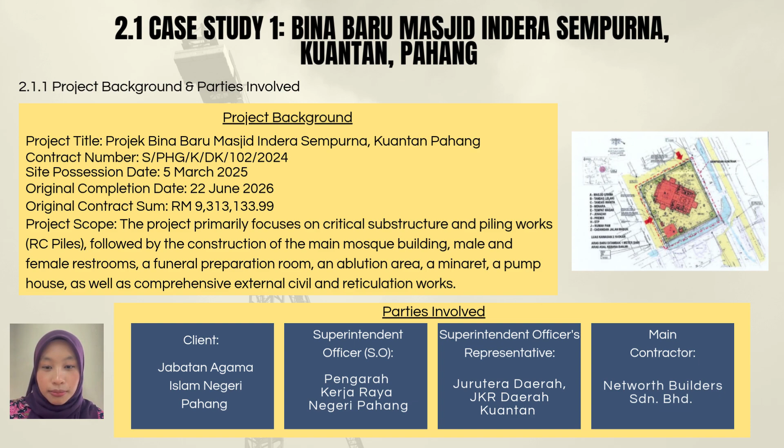The scope of this project is comprehensive. It covers everything from critical substructure and RC piling work to the main mosque facilities such as the ablution area, a minaret and external reticulation work. Behind this project, we have 4 key parties involved. The client is Jabatan Agama Islam Negeri Pahang and the SO is Pengarah Kerja Raya Negeri Pahang, represented by JKR Daerah Kuantan, and the main contractor is Networth Builders Sdn Bhd.

Moving to the next section of the slide, let's look at the design considerations for the foundation. First, due to the heavy and concentrated load from the dome, minaret and wide prayer hall, a deep foundation is required. The solution chosen here is RC square end bearing piles measuring 200 x 200 mm with a working load capacity of 250 kN per pile. These piles are driven to a depth of about 24 meters to reach the stable, competent bearing soil layer. To achieve this depth, shorter pile sections, specifically 12 meter joints, are welded together during the driving process.

To conclude the foundation work safely, the engineering team applies the Hiley formula. This allows them to verify the final set and guarantee that each pile meets the load capacity required before completing the foundation work.

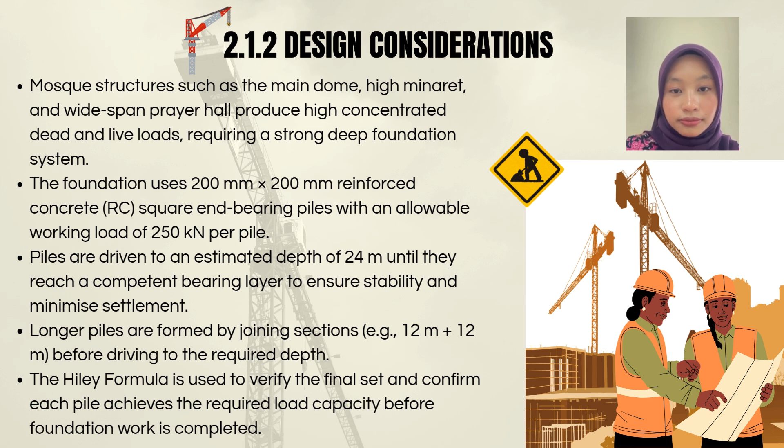Hi, my name is Shohada and I will explain the construction method justification for our first case study, which is the new mosque in Kuantan. For this project, we use precast reinforced concrete driven square piles, measuring 200 mm x 200 mm. Why was this method chosen? A mosque has concentrated structural load at specific heavy zones, like the minaret and main prayer hall. Precast piles are fabricated off-site in a factory, meaning they offer superior quality control and eliminate the time needed for concrete to cure on site.

To reach the required depth of roughly 24 meters, individual pile sections were joined together using butt welding at the joint. We also used mild steel pile shoes at the bottom tip to prevent the concrete from cracking when driven into hard soil layers. My name is Natika Najwa.

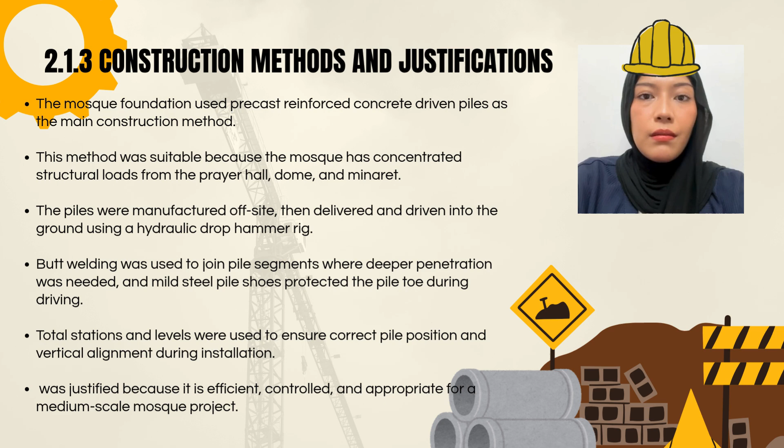Let's begin with material use. Material selection is strictly driven by structural loads and ground conditions. For the mosque project in Pahang, we utilize 200 mm x 200 mm precast reinforced concrete square piles. Cast in a controlled factory setting, this achieves a high concrete strength of grade 45 or above, which is crucial to withstand intense dynamic driving stresses. To reach the required design depth, multiple segments were spliced on site using mild steel joint plates and high penetration structural welding.

In contrast, the FT003 infrastructure upgrade in Kelantan demanded 1,800 mm diameter cast-in bored piles to support massive bridge piers and dynamic traffic loads over a soft river bank. Here, we use high slump, self-compacting, ready-mix concrete of grade 35 to 45 formulated with retarders to delay setting during long pours. Heavy high-yield deformed steel reinforcement cages were fabricated on site and lowered into the shaft.

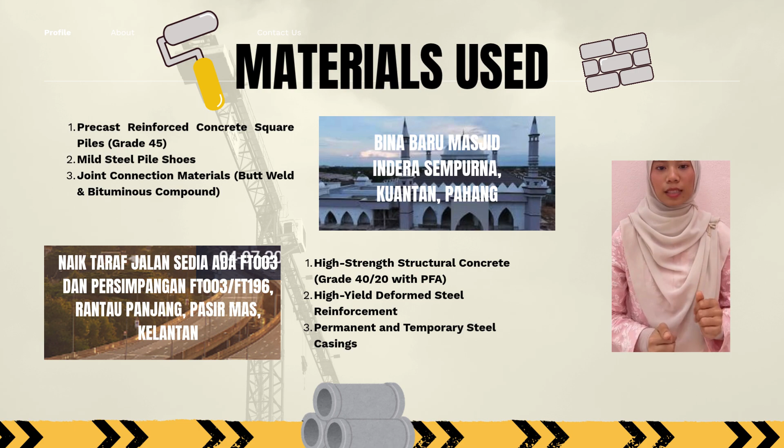To prevent the loose riverbank soil from collapsing, thick permanent steel casings were installed near the surface, paired with a specialized bentonite slurry fluid to hydraulically stabilize the borehole walls. This brings us to equipment and machinery, which highlights the physical execution of displacement versus replacement methods. For the precast piles in Pahang, our primary machine was a hydraulic hammer rig. Hydraulic hammers offer excellent efficiency because operators can precisely control the drop height and impact energy, minimizing pile head damage.

After drilling, a service crane lowered the steel cage. Concrete was discharged via a tremie pipe system. This system poured concrete from the bottom up, cleanly displacing the drilling fluids without mixing or segregation. A desanding plant filtered and recycled the bentonite slurry.

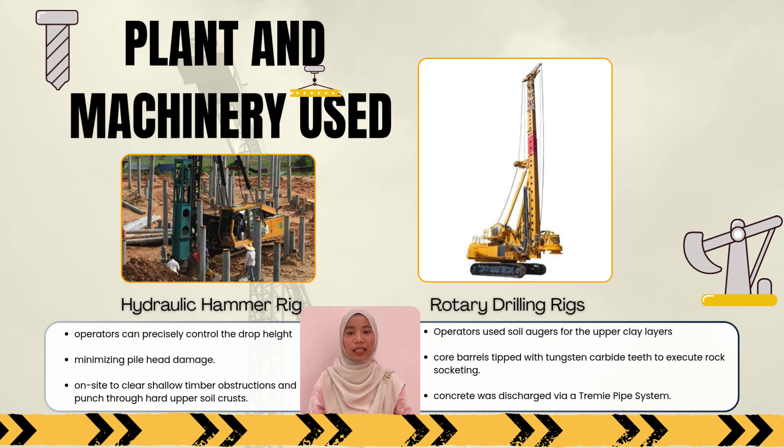My final subtopic is testing methods, which bridge theoretical design with real-world empirical validation. To detect structural defects like cracks or voids, non-destructive integrity tests are mandatory. We use PIT, pile integrity test, via the sonic echo method for the driven piles, and CSL, cross-hole sonic logging, via ultrasonic transducers for the bored piles to fully map the internal concrete matrix.

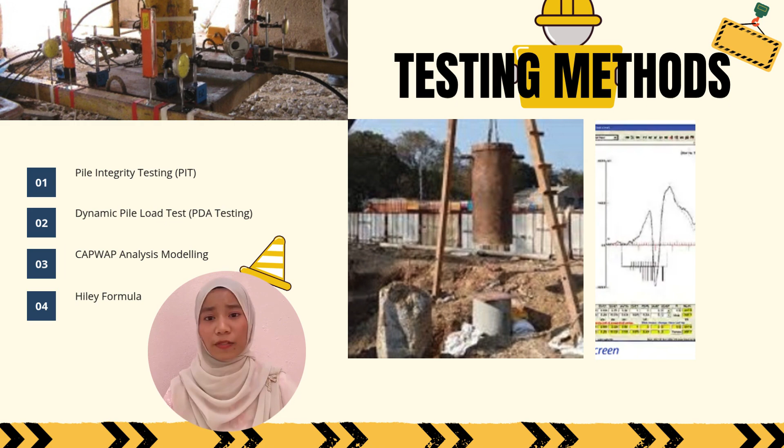To verify load capacity, the gold standard is the static maintained load test (MLT), applying up to 200% of the design load using hydraulic jacks and monitoring settlement over 25 to 48 hours. Because MLT is time-consuming, it is supplemented by high-strain dynamic load testing or PDA, where a heavy weight is dropped onto the pile to capture force and velocity data, which is refined via CAPWAP computer software to isolate shaft friction and end bearing values. Finally, for real-time validation during driving, we rely on mathematical verification with the Hiley formula.

Next, let's talk about the effectiveness of this choice. The 200 mm x 200 mm sizing was highly effective because it perfectly matched the load demand of a medium-scale building without unnecessary over-engineering. Structurally, this functions as an end bearing pile system. This means the structural weight of the mosque is transferred directly down through the pile into a highly competent, hard bedrock stratum rather than relying on weak skin friction. This securely anchors the heavy roof and minarets, completely eliminating the risk of hazardous, uneven settlement over time.

Regarding the financial aspect of case study 1, piling work makes up a significant portion of the substructure budget. Because underground soil conditions can be unpredictable, the piling items in the bill of quantities were classified under provisional quantities. This is a standard industry practice that means the final costs are based on actual site measurement after driving is complete. This financial approach protects the client from paying for unused material while ensuring the contractor is paid accurately for

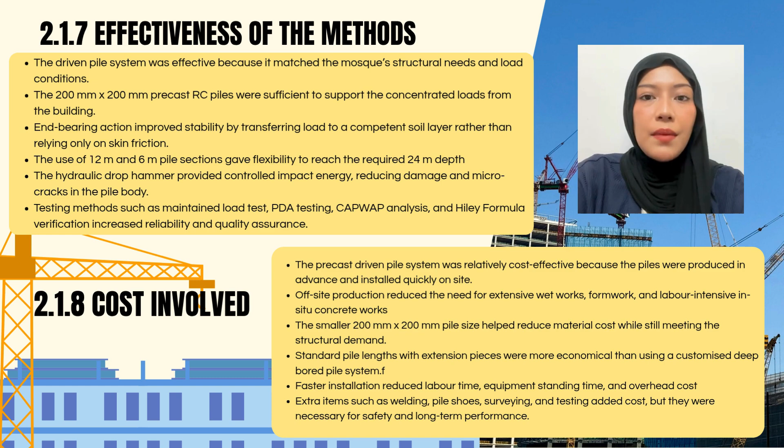the exact depth driven. So now I will present about the problems arising for this project. The first issue for this project is the change of piles from 6 meter size to two 9 meter and one 6 meter size piles. The problem is when using a lot of 6 meter piles, the workers had to weld the piles together 3 times, and more welding takes more time because the workers need to align the piles and weld them. Every welded joint is a weaker point, which can give the pile a higher chance of cracking or

breaking. So to solve the problem, the pile arrangement was changed to two 9 meter piles and one 6 meter pile, which only needs 2 welds instead of 3, which can save time, reduce work, and make piles stronger. For future recommendation, the soil investigation report should be checked carefully before driving the piles. If the ground is soft, longer starter piles should be used from the beginning.

The second issue is the pile hit a wooden obstruction at 1 meter depth. Because of this, the pile cannot go deeper. If the piling continued, the concrete pile could crack, break, or move to one side. So the piling had to stop immediately, and an excavator was used to dig the ground and remove the wood. After removing it, the hole has to be filled with suitable soil and compacted properly. Then the piling can continue without any problem.

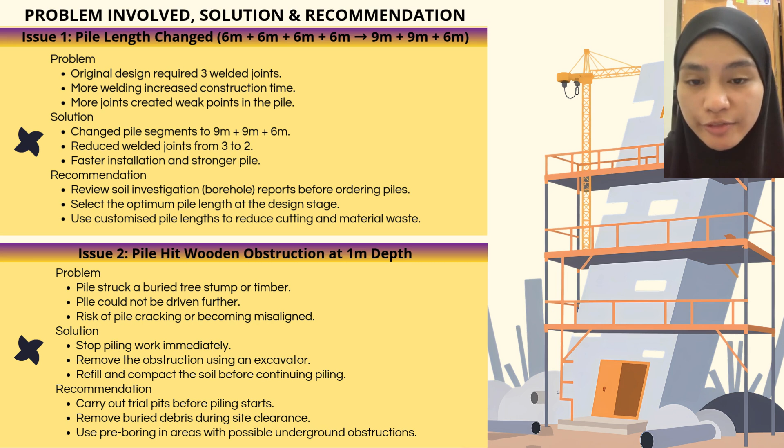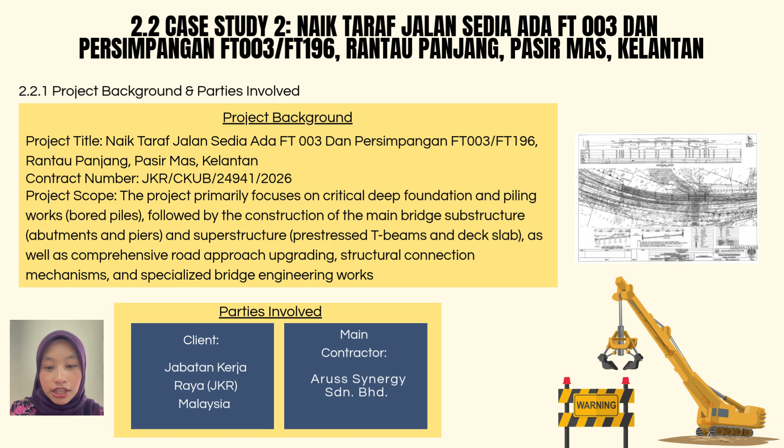Next, look at case study 2 on the slide, which involved the road upgrading and intersection project at FT003 and FT196 Pasir Mas, Kelantan. The project scope here is quite technical as it involves specialized bridge engineering. It starts with critical deep foundation work, specifically bored piles. After that, the focus moves to the bridge substructure, such as the abutment and piers, and the superstructure using pre-stressed T-beams and deck slab. It also covers structural connection mechanisms and road upgrading work. Finally, for the project team, the client for this development is Jabatan Kerja Raya Malaysia, and the execution is handled by the main contractor, Aruss Synergy Sdn Bhd.

Let's discuss the design considerations for the bridge foundation. First, due to weak upper soil conditions, a bored pile system was required. The design specified 1,800 mm diameter cast-in-place bored piles, socketed 17.3 meters deep into the bedrock to achieve the required load capacity. The entire foundation consists of 18 bored piles split into 3 pile groups for efficient load distribution.

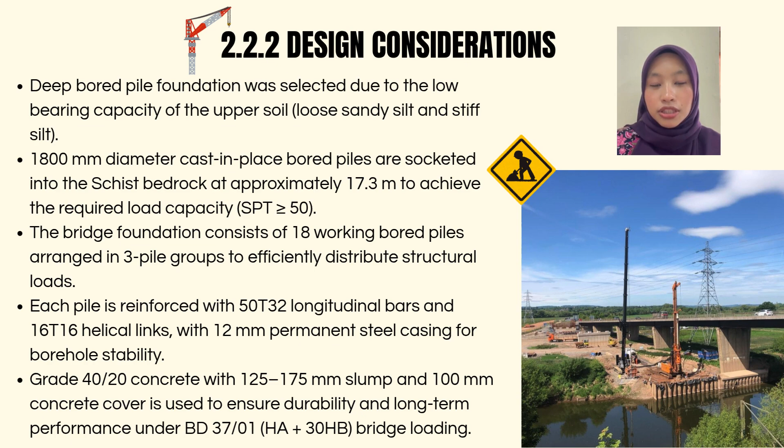Looking at the technical specification, a 12 mm steel casing was used for borehole stability, combined with 50T32 longitudinal bars and 16T16 helical links for reinforcement. Finally, grade 40/20 concrete with a 125 to 175 mm slump was chosen to guarantee the bridge's durability under heavy traffic and structural loading.

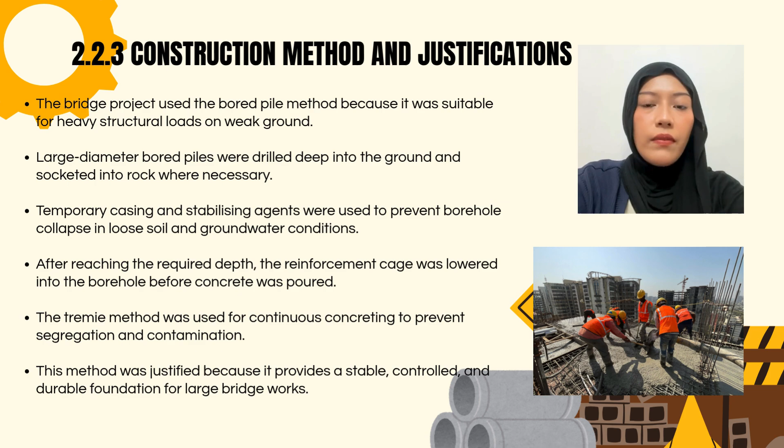Now, let's look at case study 2, the upgrading of Federal Road FT003 and its intersection in Rantau Panjang, Kelantan. For this heavy civil infrastructure project, the requirements were completely different. We had to support a large bridge structure dealing with massive dynamic traffic loads. Therefore, the team utilized a bored pile foundation system, which involved drilling deep holes into the ground and casting the concrete right on site. Bored piles provide massive vertical load capacity and excellent lateral resistance, making them the ideal engineering choice for bridges that must withstand continuous heavy vehicle movement and harsh environmental conditions.

Now, let's look at how effective the bored piling system was for the road project. It proved outstandingly effective at handling massive dynamic traffic. Infrastructure at intersections and bridge approaches is highly prone to shifting forces from heavy commercial trucks. By anchoring the bridge piers deeply into stable underground strata, this foundation creates an incredibly rigid matrix. This effectively prevents dangerous pavement sinking where the road meets the bridge, drastically lowering future maintenance needs and extending the road lifespan. Finally, let's look at the cost for the infrastructure project.

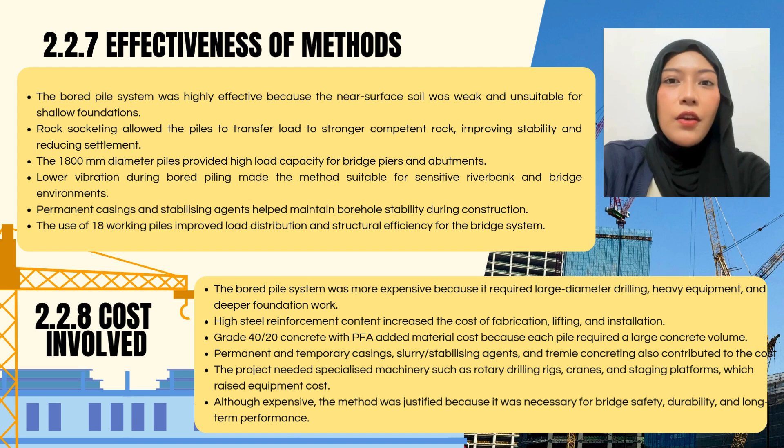Bored piling requires a high initial capital investment, largely due to the strict quality assurance testing required by the standard JKR specification. To ensure total structural safety, the project budget funded 4 static load tests, 12 PDA tests, 18 pile integrity tests, and 18 sonic logging tests. While this extensive testing adds upfront cost, it is absolutely essential for public infrastructure. It ensures zero defects in the deep concrete shaft, guaranteeing the bridge remains safe and maintenance-free for decades to come.

For this kind of project, there were 2 issues that arose. The first is borehole collapse in wet soil, where the bridge is built near a river, so the soil is very soft and full of water. When the hole is drilled, the soil can collapse into the hole, which can trap drilling equipment, damage the foundation, and delay the work. So to stop the hole from collapsing, the team used steel casing to support the top part of the hole, and also filled the hole with bentonite or polymer slurry to keep the soil stable until concrete was poured.

For future projects, use a slurry testing machine to check the drilling automatically. Also use a Koden test to scan the borehole after drilling, which helps engineers find any problem before concrete is poured.

The second issue is that the reinforcement cage cannot be installed properly during installation. This happened because the borehole had collapsed slightly, there was soil at the bottom, or the cage was bent or the wrong size. This caused delay and could affect the strength of the foundation. The work was stopped to check the problem.

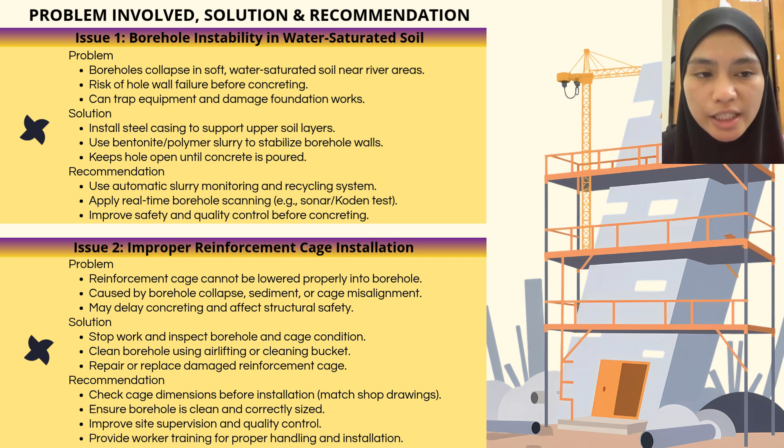As the solution, the borehole was cleaned and the reinforcement cage was repaired or replaced if needed. The cage has to be lowered carefully into the correct position before concrete is poured. For the recommendation for this problem, the worker has to check the reinforcement cage before lifting and make sure the borehole is clean and has the correct size.

My name is Asha and I will be presenting the comparative analysis and critical evaluation between two deep foundation systems used in different construction projects. The first project is the completed Masjid Indra Sempurna in Kuantan, which uses precast reinforced concrete square driven piles, while the second project is the ongoing road and junction upgrade in Kelantan, which uses large diameter bored piles. First, I will explain the similarities between both projects.

Although they use different piling systems, both projects have the same main purpose, which is to transfer the structural load safely to the competent soil and rock layers. Both projects also require similar preliminary activities before piling work begins, such as mobilization of piling equipment, preparation of piling records, pile head treatments, cut-off works, and pile load testing. These activities are important to ensure the pile achieves the required design capacity and quality.

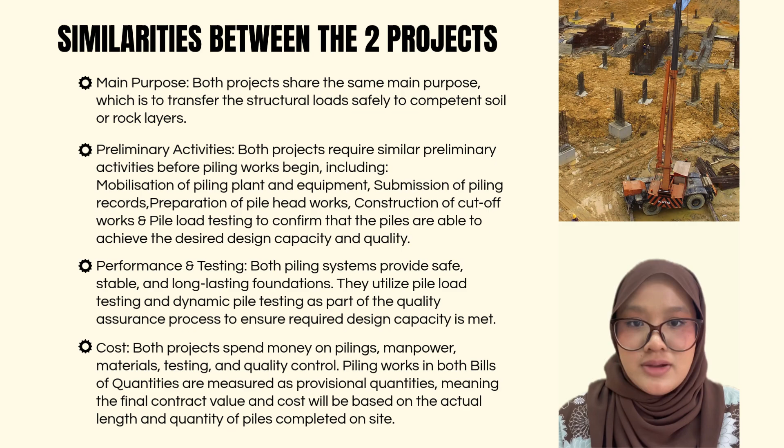In terms of performance, both piling systems are designed to provide stable and durable foundations. They also undergo pile load testing and dynamic pile testing to verify that the installed pile can safely support the design loads. From the cost perspective, both projects include expenses for piling materials, labor, equipment, testing, and quality control. In addition, the piling works in both bills of quantities are measured as provisional quantities, meaning the final cost depends on the actual pile length and the quantities completed on site.

Next, I will discuss the differences between the two projects. The first difference is the type of piling and its purpose. The mosque project uses 200mm x 200mm precast reinforced concrete driven piles to support building columns and the structural loads of a two-story building. In contrast, the road upgrading project uses 1800mm diameter bored piles to support bridge piers, abutments, and continuous heavy traffic loads.

The second difference is the construction method. For the mosque project, the piles are precast in a factory and then driven into the ground using a hydraulic hammer. If a greater depth is required, additional pile sections are welded together before driving continues. This method is relatively simple, faster to install and requires less in situ concrete work, making it suitable for medium-scale building projects.

On the other hand, bored piles are constructed by first drilling a large borehole to the required depth. Temporary casing may be used to prevent collapse before the reinforcement cage is installed and concrete is poured using the tremie method. This process requires specialized equipment, skilled workers, and more construction time. However, it is necessary for infrastructure projects because it provides much higher load-bearing capacity.

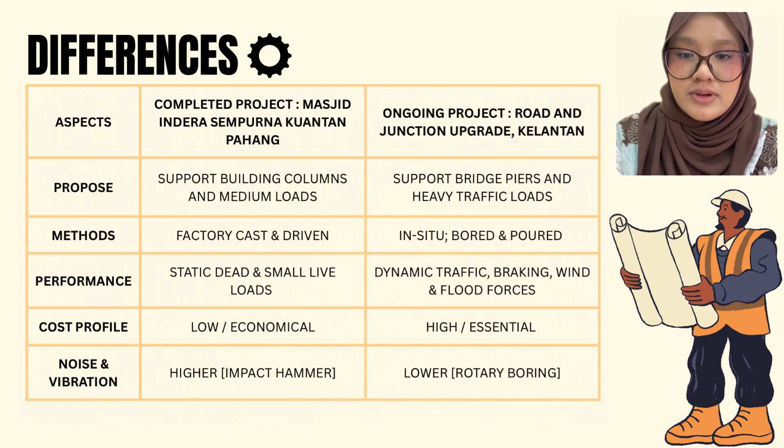Another difference is that driven piles generate higher noise and vibration during installation, while bored piles produce much lower noise and vibration, making them more suitable in sensitive environments.